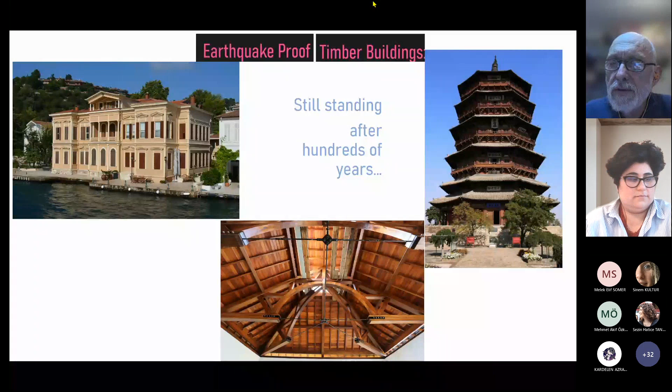So that was the second slide. We have examples of timber buildings in high earthquake regions, and they are still standing. On the left is a Turkish building. On the bottom is the concert hall in Boğaziçi University. On the right is a 70 meter high Chinese pagoda from the year 1000 - so that's 1000 years old.

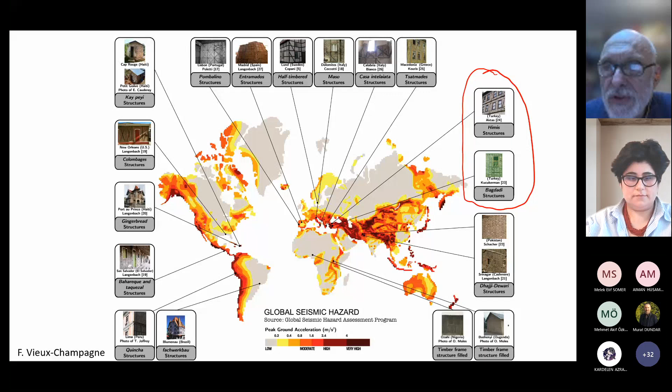So it's a very nice compendium that shows, all over the world, where the seismic hazard is biggest - you see the red and brown colors - there are a lot of examples of buildings made of wood that are still standing and behaving very well. And here I just underline the Turkish Himis and Bagdadi structures.

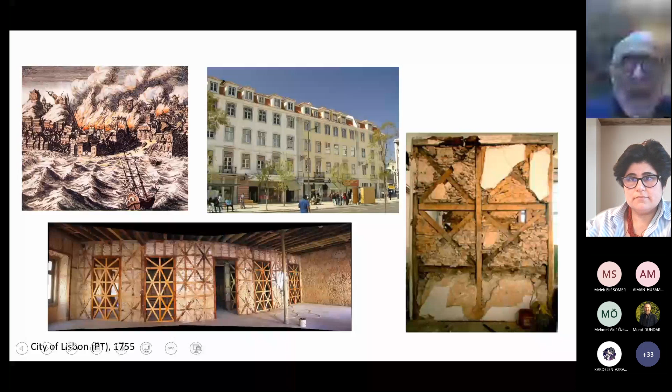It's 600 years old. Here in the city of Lisbon, after the quake of 1755, half of the city was rebuilt using a combined system of timber and mortar infill, or brick infill, called Pombalino. After the stucco, in the central picture, there is the skeleton of the Pombalino structure.

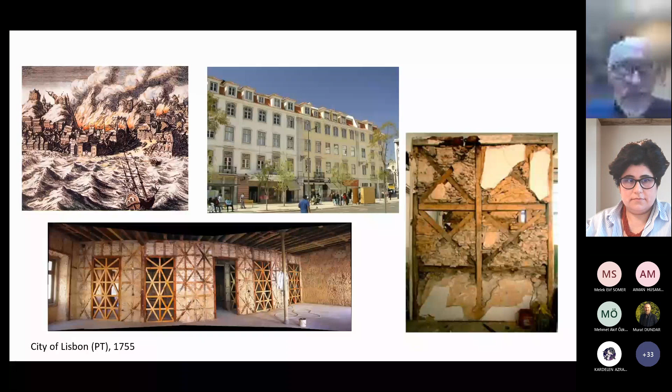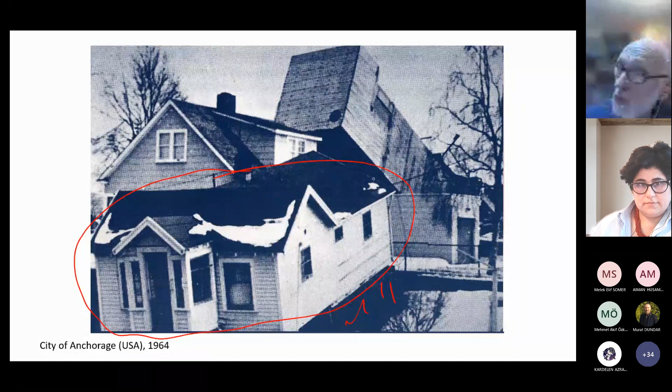Unfortunately, we have other examples from history that are not so good. Here is the 1995 Kobe quake. These two buildings are not made of wood, just concrete and steel, but you see one floor was completely missed here - the quake was terrible.

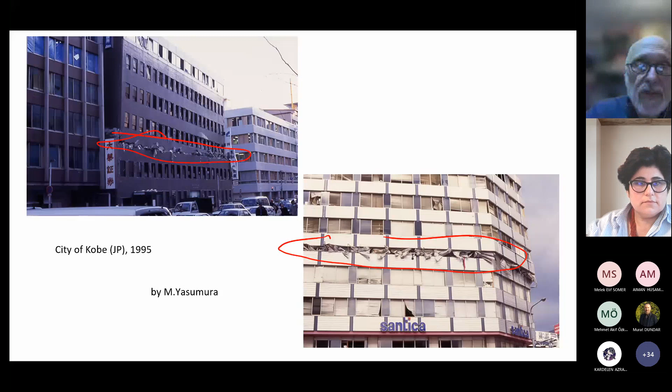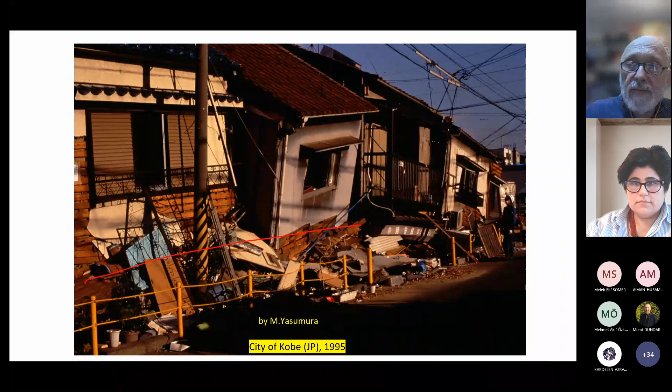And some thousands of wooden houses collapsed on the first floor. This group of houses was 2-floor houses, and the ground floor collapsed. You see here in the foreground houses like the ones I showed you before, and in the background, intact houses.

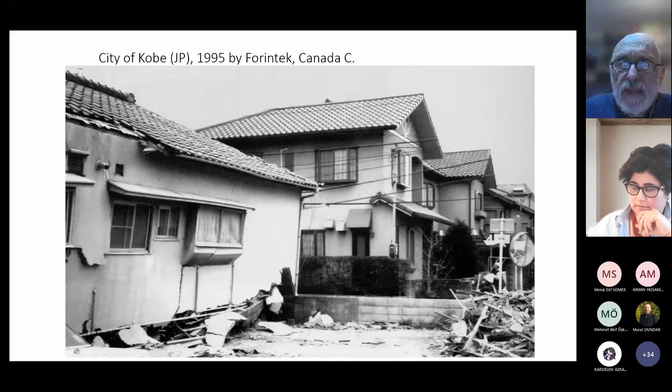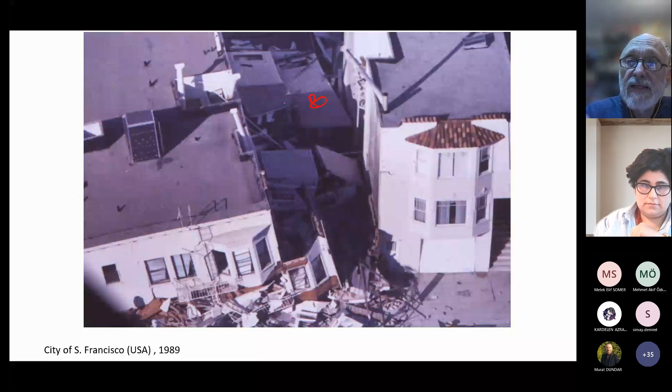How could that happen? The lesson for my students is always the same - the same thing I'm always saying. You need a good code, you need a good design in seismic regions, but you also need good execution. If one of these fails, something will go wrong. In this case, the execution was bad. In the left side building, instead of 3 nails per meter, they put just 1 nail per meter to save money, and they lost all the safety coefficients.

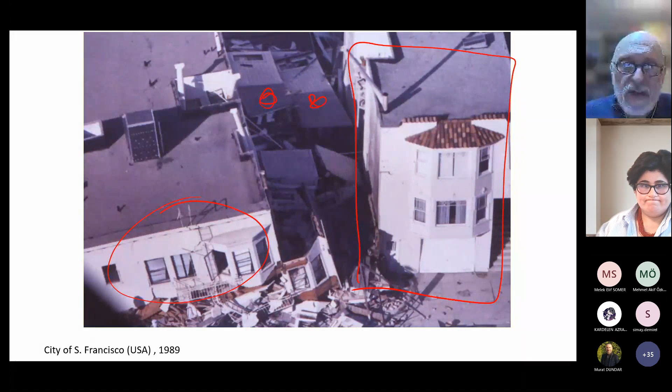So this was actually the result of a bad execution.

So, the basic concept about seismic resistance, the earthquake-proof concept, the first of our 3 points today. Before the quake, the building is intact. During the quake, there is shaking and there is moving. There is an introduction of energy to the building. The building is moving. There is a velocity. There is a kinetic energy. And after the quake, we hope that the building will still be standing, maybe damaged, but still standing.

So in the case of wooden buildings, this may happen thanks to two different points. One point is that the weight of a timber building is usually modest compared to a similar-shaped reinforced concrete building; it is 1/3, 1/4. And the second point is that the total energy input at the base of the building is dissipated within the structure without collapse.

So point 1, when I say the weight of the building is modest, modest means everything, it means nothing. The point is, modest means that a wood structure is lighter than, let's say, an equivalent reinforced concrete structure. This is not a joke, actually. It's just the same building painted gray on the right-hand side, and it can even have dimensions similar to a concrete building. This is a timber building. This is actually a fake of a concrete building.

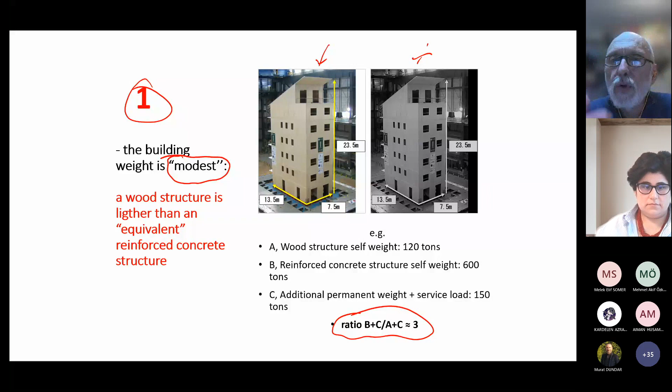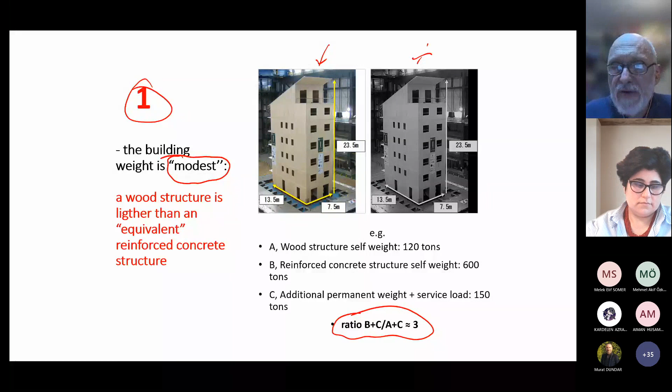But the point is the ratio between the weights, the seismic weight, is three times, because the weight of the building is given not only by the structure, but also by the sidings, the floors, all the HVAC, everything, the people. So the ratio between the self-weight of concrete and wood is not the same ratio as the density of concrete and wood. The ratio of the density of concrete to the density of wood is 5 times, but in real life it comes down to 4 to 3.

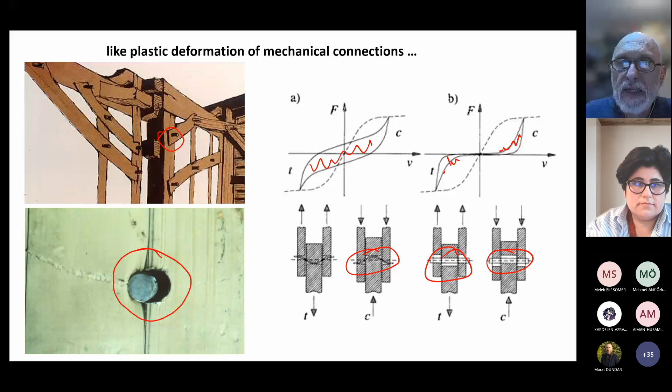The second point is that the total energy input at the base of the building is dissipated during the quake. So we have dissipating energy here by connections between elements. So at the end of the quake, we have a 3-hinge arch that is still standing. So the energy is dissipated at the level of mechanical connections through plastic deformation of the connections. Here they have plastic deformation, and this is the energy dissipated according to the different connections, because we have internal damage, but this internal damage dissipates energy and helps the building stay standing.

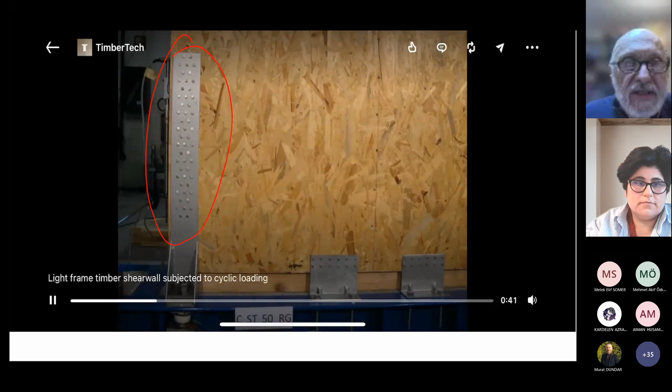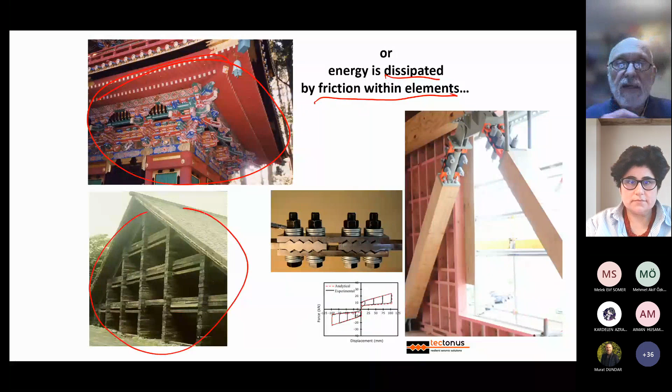Let's see if the movie starts. You see here, all these nails are dissipating energy, moving. All the energy is dissipated by friction within elements. Here, in this Japanese pagoda, there are no nails, not at all, only wood. So energy is dissipated by friction, not by the deformation of nails and the bending of the wood. So here is Indonesia. Here, the energy is dissipated by the friction between elements.

So this concept of friction is being used, very newly, in New Zealand by the University of Auckland. They invented a friction dissipating device that is called Tectonus. This can be used to dissipate energy with no damage. So the difference between this one and this one is that with the second one, there is no actual damage.

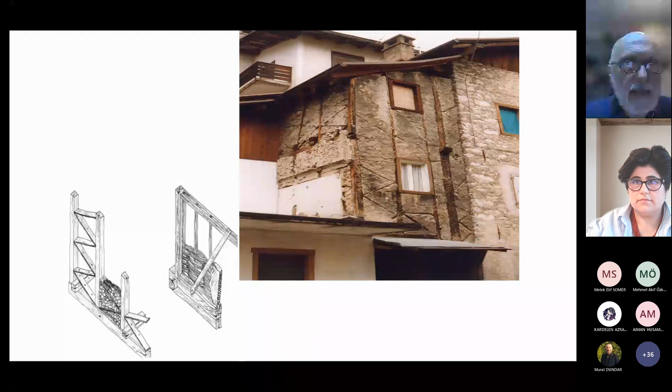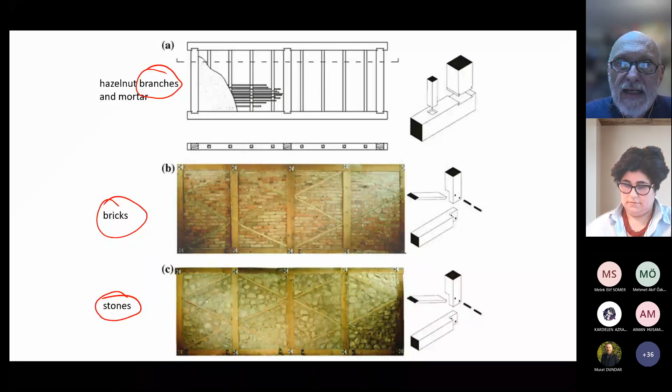So this is important. I show you these pictures here because this work was done by a student of mine when I was in Venice, and this student was an architecture student. So this is the north of Italy, and these are similar to the construction we have seen before, the timber frame, with infills of branches, bricks and stones. So this colleague of yours, some years ago, a young, very enthusiastic student, built all these specimens by himself, and he tested them under a force going this direction and going back.

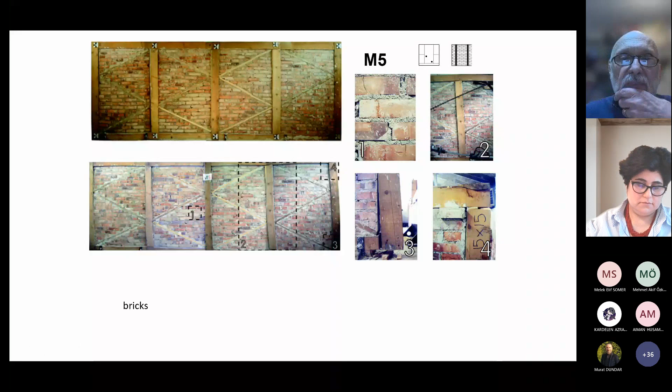And this is the hazelnut branches and mortar. And you see the final result and the damage. And then there is the stone. I'm not showing you the stone one, but there are also the bricks. And you see here the damages, and you see here the bricks and the hazelnut branches. So you see here the difference between the hysteresis, the energy dissipated. And also the strength is 5 times more, and the final displacement is much bigger.

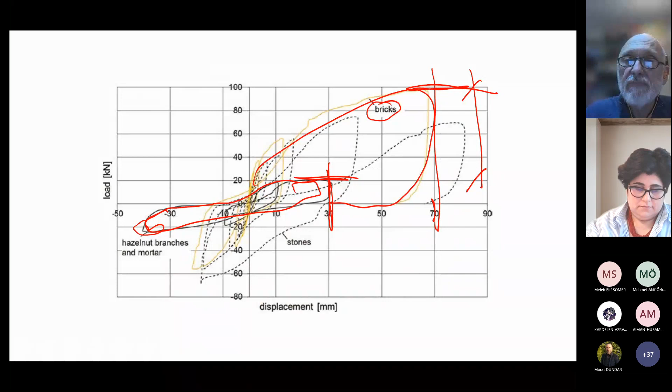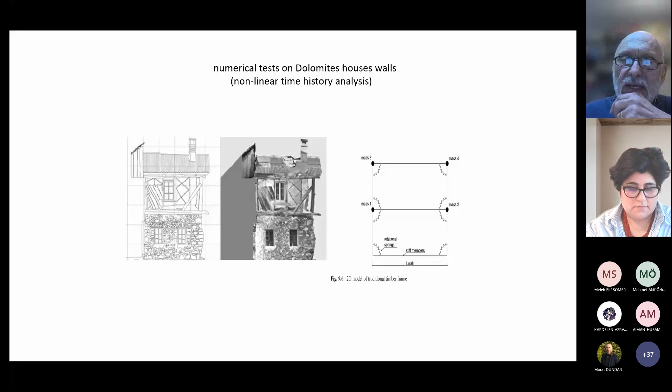So actually this is a work done by another student of mine, but this one was an engineering student, and she made a model of this, and at the end she came to a conclusion about how the branches one and the bricks one, buildings made of these walls, could resist a big ground acceleration of different quakes.

Why do I show you, students of architecture, this test? Just because you will be asked in your career to evaluate how to restore an ancient structure. Engineers tend to reinforce everything. You as architects should keep your engineer colleagues calm and ask them to try to judge better and to make tests, because calculations per se, in my opinion, are not enough. You risk over-reinforcing buildings that actually don't need it.

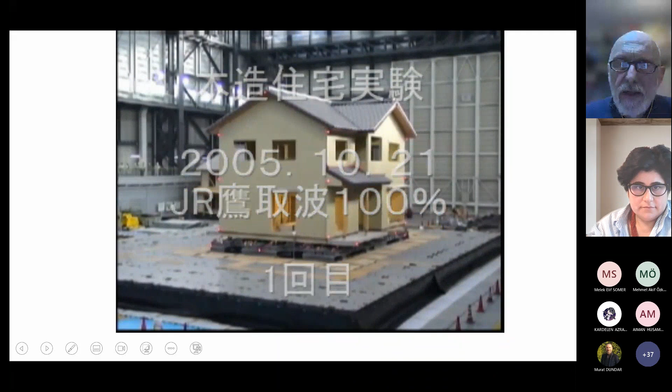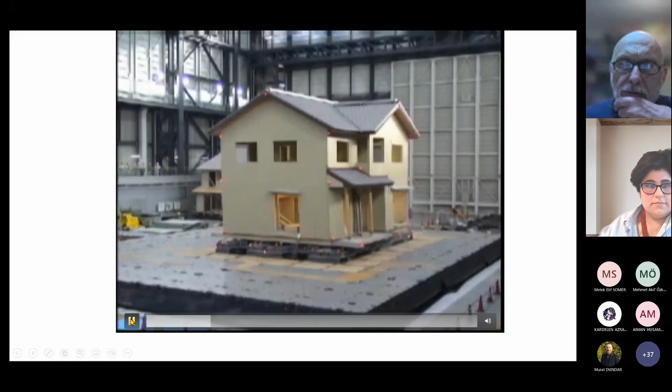So here there is a test. I suppose you don't hear the noise, you hear my voice only. This is a test done in 2005 on a 2-story Japanese system timber construction in the NIED laboratory in Miki, Japan. Sorry. So this is the first test, 2005. And you see the building is moving. You see some damages here. But the building actually is resisting.

So just let me check. Do you hear my voice? Hello? Yes, we can hear you. No problem. Okay, you have seen the movie? Yeah. Yes, sorry, because I must confess, I wasn't able anymore to give lectures online with my students at Boğaziçi. It's always very tiring to me. I don't see anyone, I speak to myself. Sorry about that. I need some confirmation from you that you are seeing what I'm showing you. So,

Oh, I'm sorry. So the Japanese actually do it like this. When they have something new, they make a test. This house was built according to the new regulations, and the company built this prototype. They came to NIED and made this test to show this house was capable of resisting a big quake, the design quake, and it resisted. The results were satisfying. Everyone applauded at the end of this test. Everyone was happy because this means earthquake proof. So lives are protected. No one would have died in this building.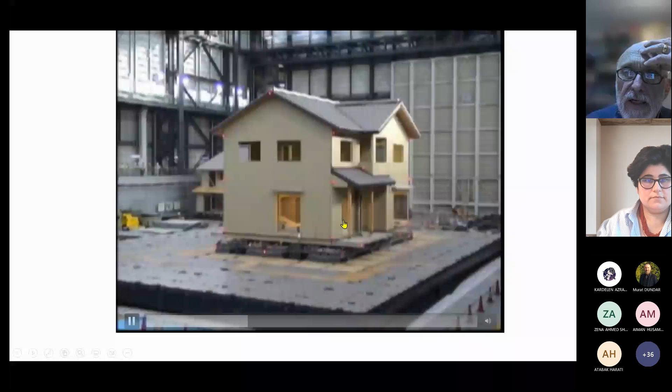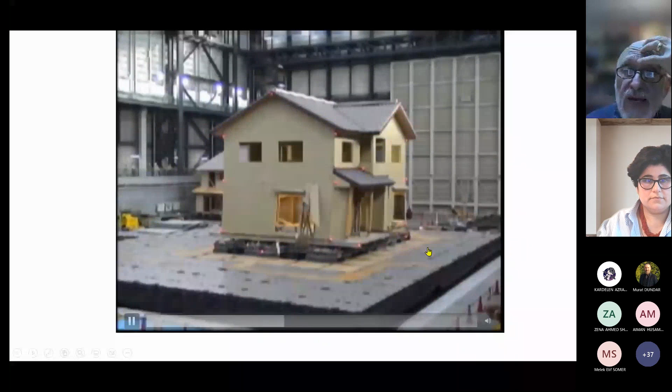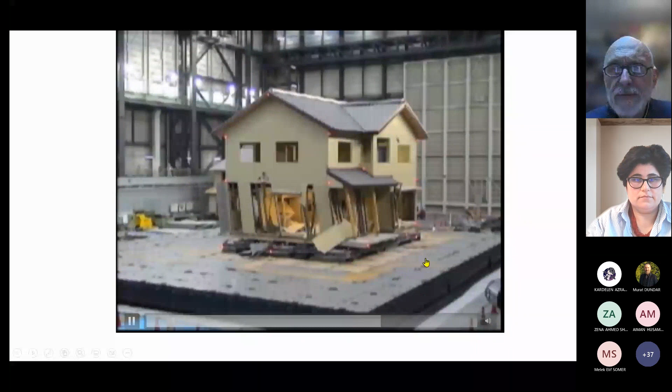But as researchers, they continued the test without any intervention. And this is the second test. And this is the quake, the 1995 quake of Kobe. Of course, this one actually is a little frightening, but this building is still standing. And now we have the third quake in a row. Okay. So, as I said, this test was successful.

Everyone was happy because human life was protected. The same concept we have in our cars. This is a famous example of a Formula One Grand Prix, and the pilot is safe. The car is wasted, but it doesn't matter. The human life is protected. So the concept of earthquake-proof timber buildings is that human lives are protected.

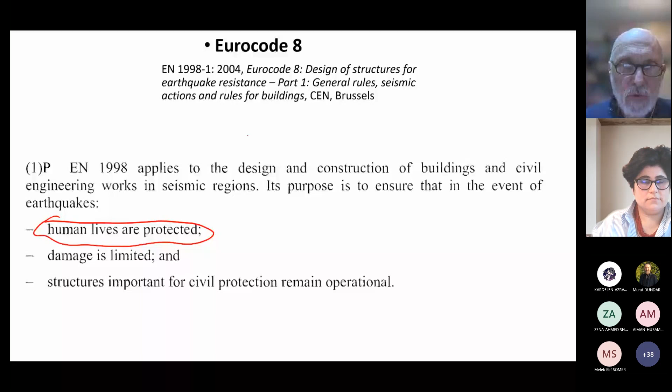But in Eurocode 8, and of course in your Turkish seismic design standards, one of the most advanced standards in the world, there are several levels of, let's say, safety. The first level is the one I showed you now, I spent these first minutes talking about this: human lives are protected. But they also consider other buildings, the so-called strategic buildings that must remain operational after the design quake.

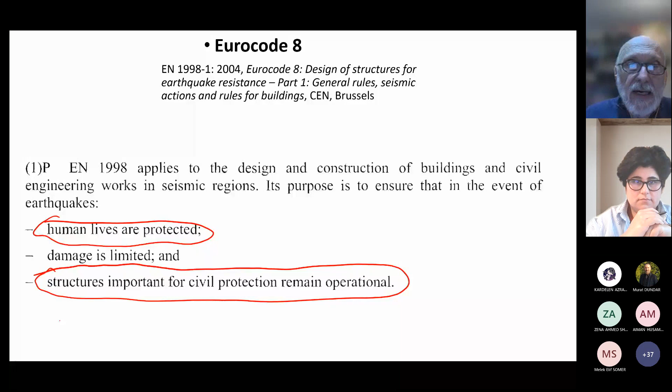So a difference is made between ordinary buildings and strategic buildings. The design level quake of these two classes of buildings is different. That means the strategic buildings can be designed to resist such a large quake without any important damage, but of course they will cost much more than ordinary buildings like houses.

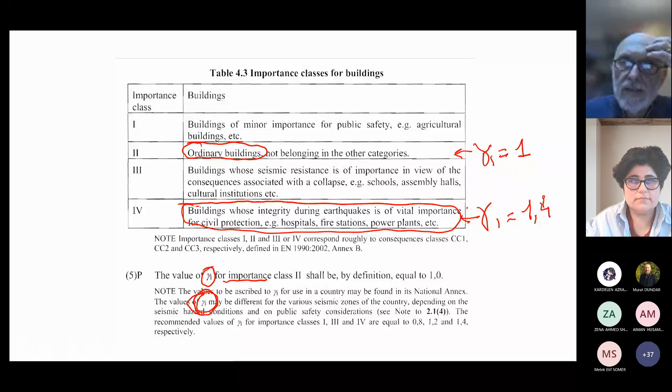So in Eurocode 8, a so-called importance coefficient, gamma I, was invented. Gamma I for ordinary buildings is 1, and gamma I for strategic buildings is 1.4 or 1.5. So what is the point? You increase the design action of the quake. Look at this.

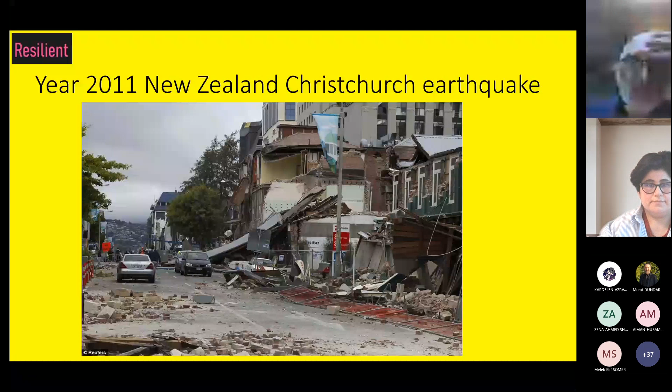But what was the problem? The problem was that all these buildings were actually abiding by the rule of saving lives. No one died in the Grand Chancellor Hotel. But the point is that this hotel was really damaged. No collapse, but heavily damaged. It was decided that reinforcing was impossible, and they decided to demolish it, floor by floor coming down. It cost a lot of money.

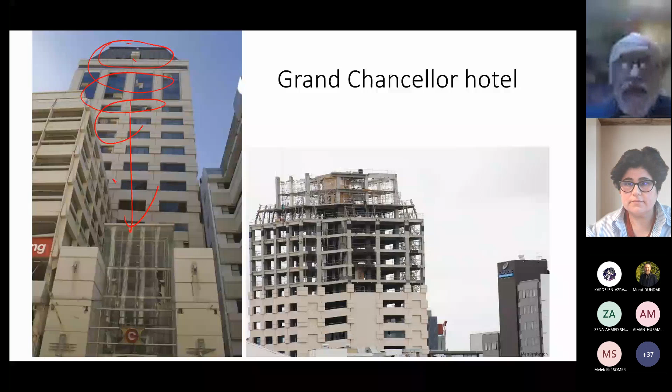You must know that in New Zealand almost all buildings are insured against quakes. That means that if a quake comes, the insurance companies must reimburse their clients. In the case of New Zealand, insurance companies would take around 40 years to pay off the cost of the Canterbury earthquake. 40 years. So they risked going bankrupt, actually.

So in order to avoid a similar situation: they had casualties, of course, but a lot of buildings just needed to be demolished. Under the pressure of insurers, we should think from now on to design regular buildings, even if they are not strategic, more or less as strategic buildings. This is the formula used in Eurocode to consider the design shear earthquake action at the base of the building, increasing this quantity by the coefficient gamma I.

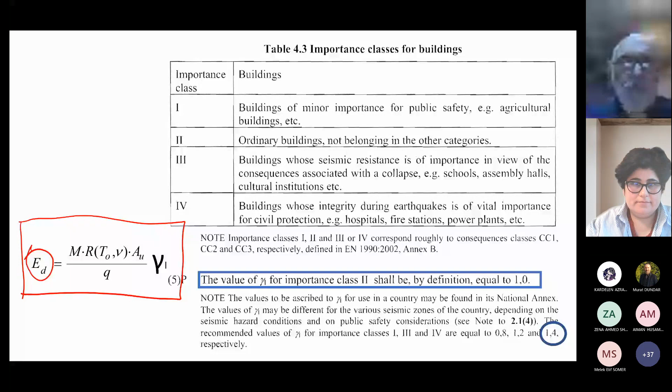In fact, in 2017, at the World Conference in Chile, this word resilience started to appear, and resilience was considered a new challenge in earthquake engineering. The present seismic design criteria of life safety, requiring that buildings do not collapse, must be replaced by codes that allow cities to continue operating within a few days. This is a consequence of the inability to evacuate millions of people from a megacity. There is also the point of making insurance companies work profitably, with no bankruptcy.

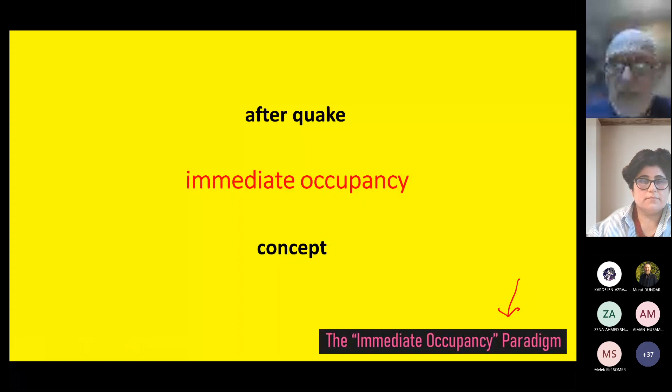So these are the strategic buildings. Of course, we may not say we want to build every single house as a strategic building, but between life safety and operational there is the concept of immediate occupancy. An immediate occupancy building is safe to occupy, but possibly not useful until cleanup and repair have occurred. The important point is people can immediately re-enter the building. Maybe it's not perfect and needs some adjustment, but it's still occupiable.

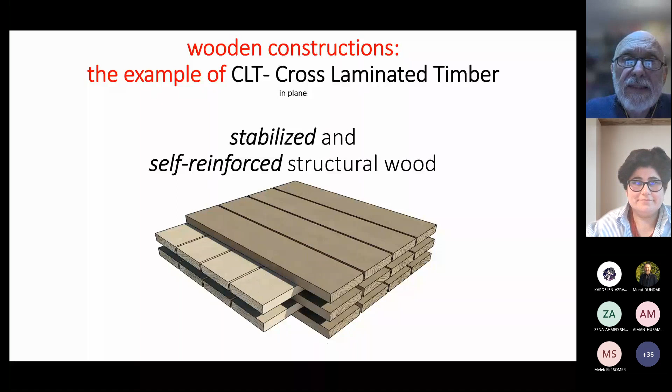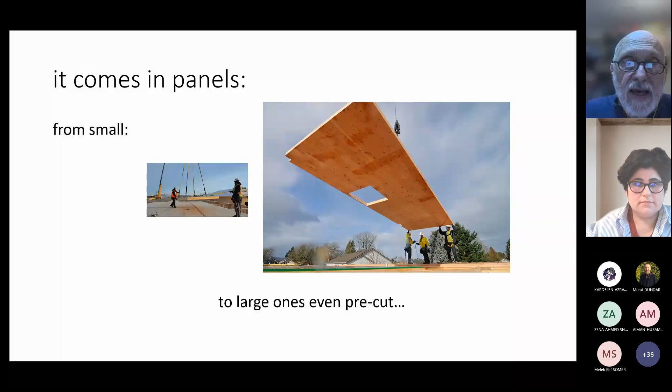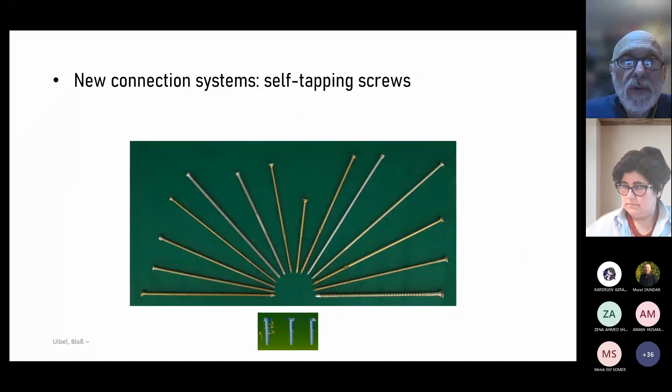Regarding wooden constructions, since my presentation is about wooden constructions, I show you the example of cross-laminated timber. I'm getting short of time, so I'm going a little bit faster. This product was invented and tested at the end of the 1990s at the University of Graz. The panels come in big or small dimensions, can be worked very precisely, with 1 millimeter precision, and are connected with self-tapping screws and plate connectors.

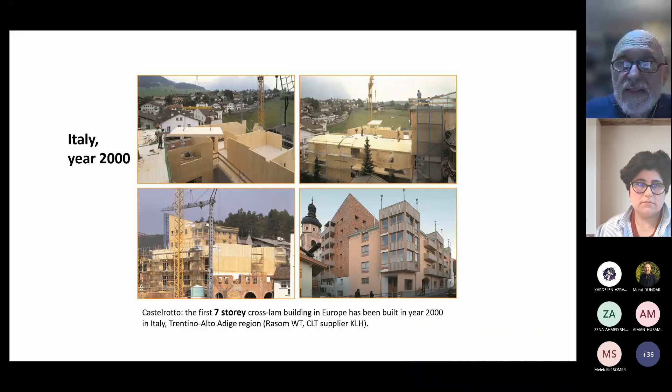So you can build a very rigid and stable building made of these panels connected by nails, screws, and connectors in a very efficient way. And construction is very fast. In Italy, this was the first medium-rise, 7-story CLT building.

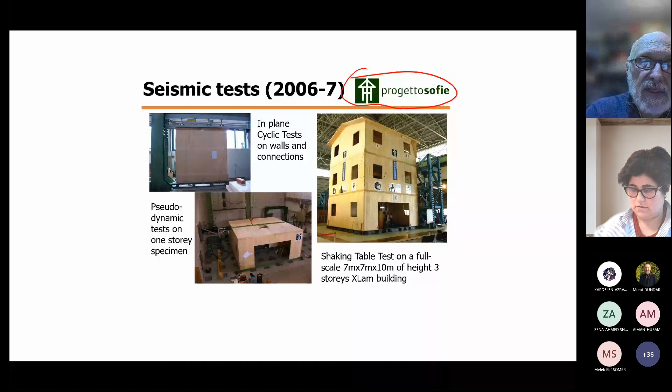But at the University of Graz, no one checked the CLT buildings against earthquakes and seismic actions. So this was done in Italy with Progetto SOFIE, and we started testing single walls, then one floor, and then three floors. And you see the testing on one wall, you see the hysteresis loops. At the beginning, we thought that because these panels are very rigid, the dissipation of energy wasn't actually very much. Instead, in real life, we detected that the energy dissipated here can be important.

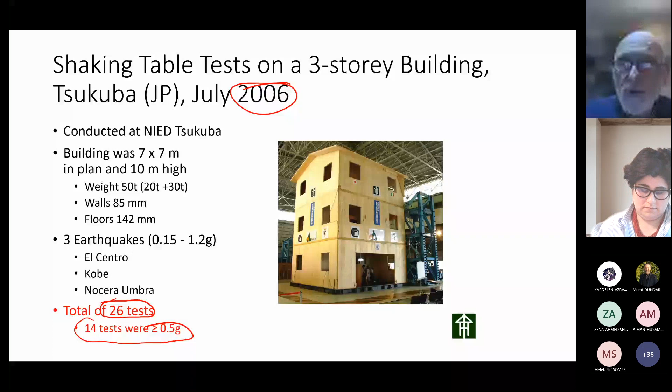In this building, we made a total of 26 tests, and 14 of them were more than 0.5 g of peak ground acceleration. So this was the first, this is 2006. You remember the movie, the Japanese movie, 2005. So when we went to Japan to test this building, I must confess, I was thinking this building sooner or later would collapse like the other a year before, but it was impossible to make this building collapse.

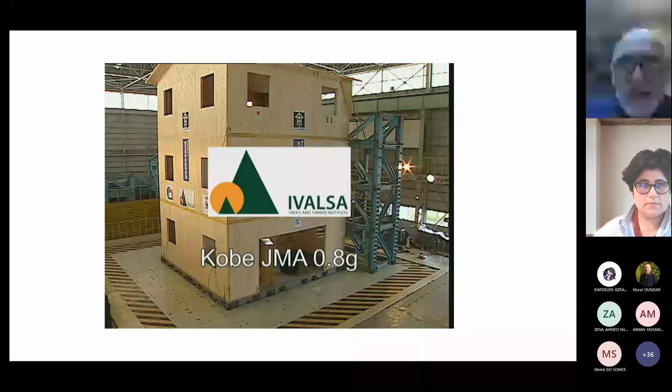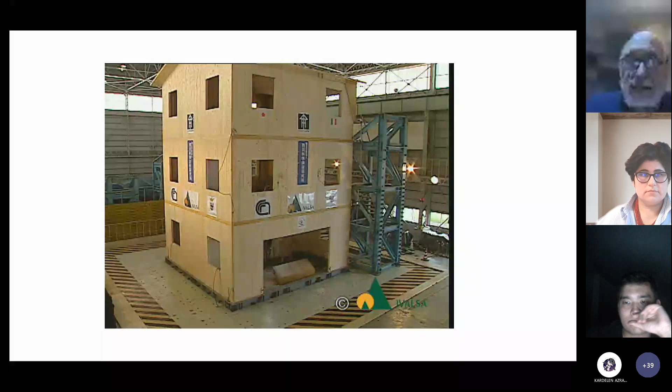So this is the real Kobe, the one that destroyed the building before. And this was all. And a lot of tests. At the end, we gave a 1.2 g quake, and the only damage was here, a few nails broken, but the building was still standing very straight.

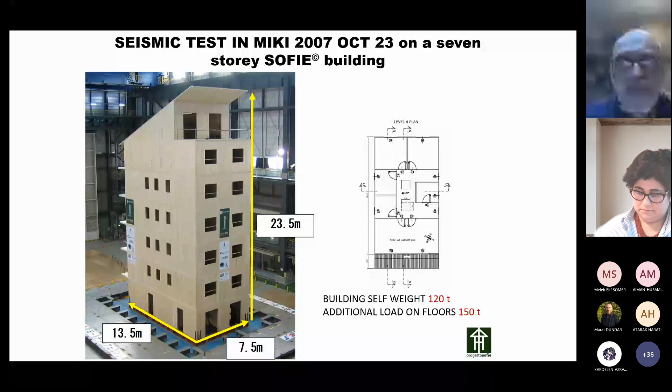So the year later, 2007, we tested a seven-story building. And here you see the arrangement of the connections. And that building was designed according to Eurocode 5 and Eurocode 8.

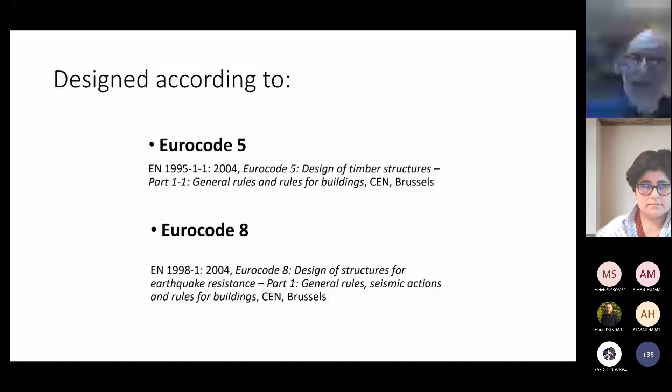By the way, Eurocode 5 and Eurocode 8 are translated into Turkish. So if you ask the TS office, you can have them. As a student, I think you should have them free of charge. I don't know, but ask your professor.

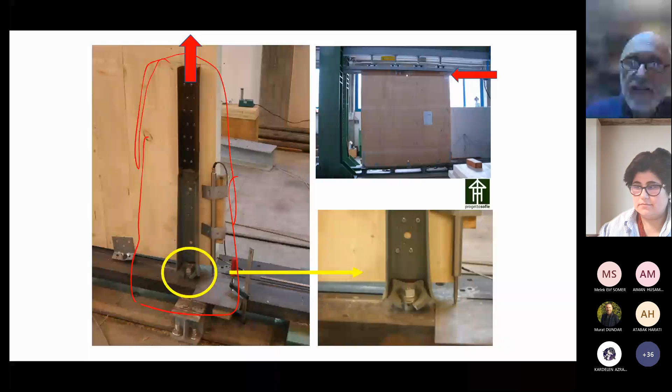Look, it takes a few minutes because there was counting from the speaker. It's coming.

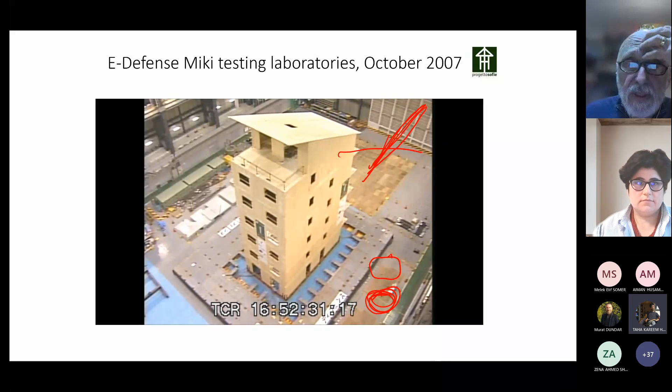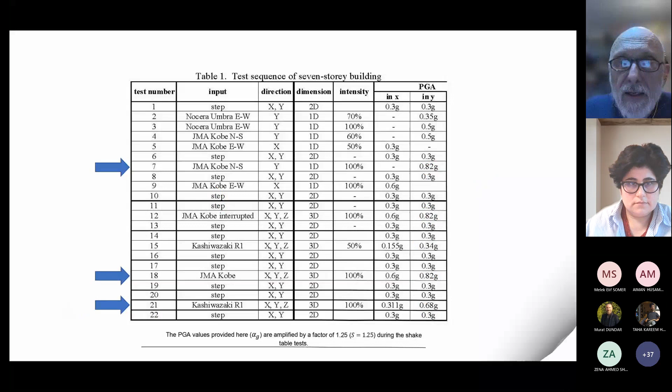That after more than three quakes, actually after, let's say, 22 tests, not all of them quakes, some just step testing. But this is test 1, this is test 2, and this is test 3 that I showed you in the movie. So after all these tests, everyone multiplied by 1.25 because of the design, but that doesn't matter. So after also this quake, the building, this was before, this was after.

If you remember the movie of 2005, the two-story Japanese building was completely different. After three tests, it was destroyed. So I must say that since then, there is no more test on timber buildings that will achieve collapse, but everyone wants to test resilience, to show that their buildings are resilient.

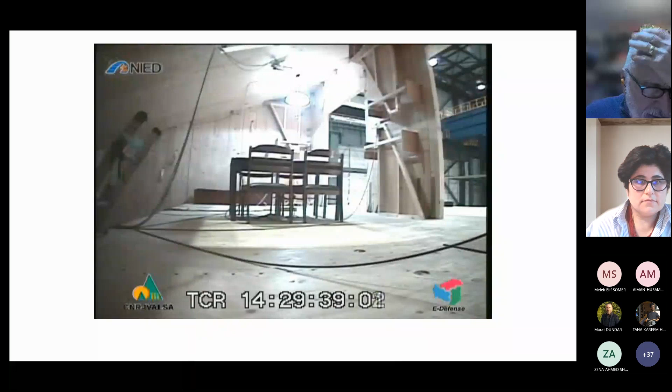Here, what does immediate occupancy mean? If you look at the short direction, the frequency of the building after all the tests more or less remained the same. We had a reduction of the frequency in the long direction, but actually you can live in this building without any problem. The building is a little more deformable, but is still capable of hosting people. Okay. This is good. I mean, in this way, we can say CLT buildings are very good for immediate occupancy construction.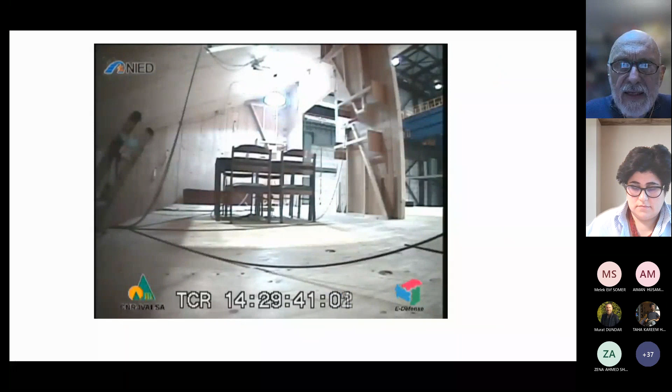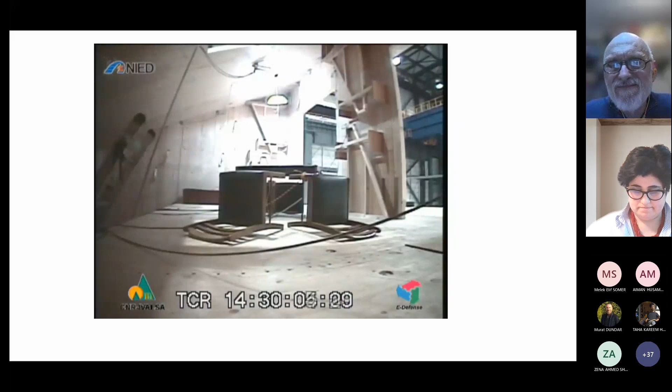But I want to show you something like this, because you may ask yourself: if this building remains, let's say, elastic, okay, we have energy dissipated, but the building actually remains mainly elastic. That means from the bottom to the top, we have an amplification of the acceleration. At the bottom, we had 1 g. On the top, we had 2 g. So 2 g is not very much, but it's still important. You see the table, etc. So the idea is a further step.

The idea could be to use base isolation, and, you know, this is the same building of 2005 that I show you later. But in this case, look here. If you look here, at the bottom there are isolators. There are isolators.

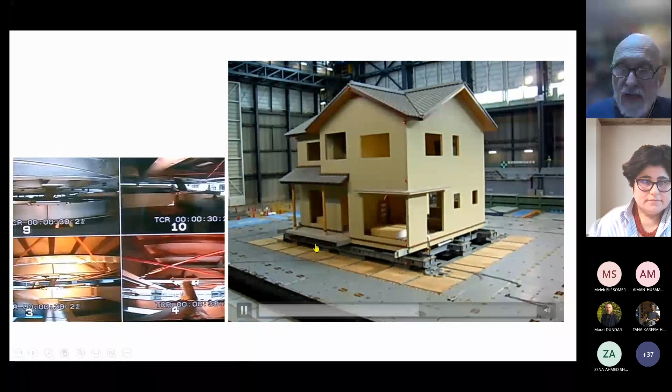You see, these are the pictures taken from below, and you see how it works. So in this case, you can actually build a house, like my friend, who was even my former student, built. You see the man here, right? This is the man. So it's a very simple 2-story house that he wanted to build on seismic isolators. I think it is not really necessary for such a small building.

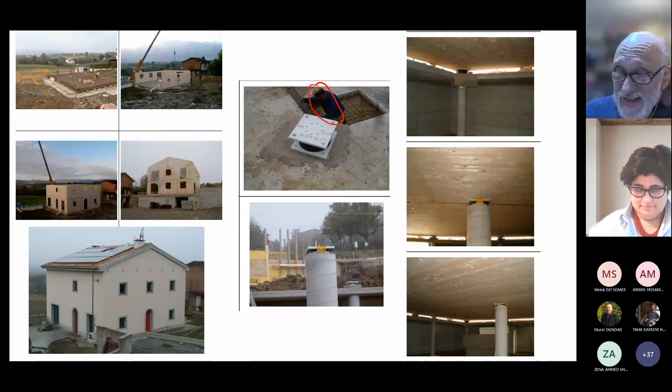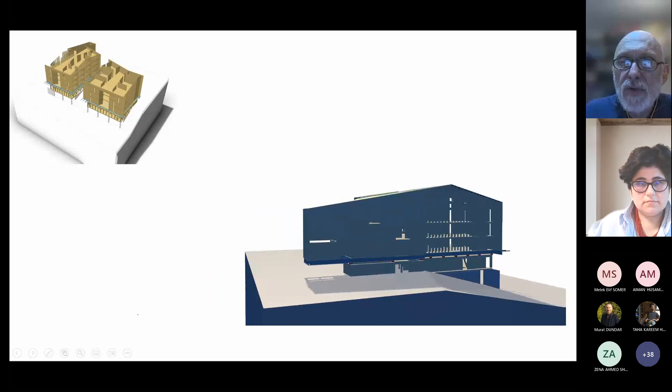But in the case of, let's say, strategic buildings like this one, for example, that has been designed and is under construction by Professor Nuti, University of Rome, you see these buildings are on seismic isolators, and you see they are moving. So in this case, you can actually guarantee that the content of your building is safe, because the amplification of the base peak ground acceleration doesn't reach the building.

So why am I showing you this point? The point is that with timber construction, you can build a resilient, immediate occupancy building for residential purposes without seismic isolation. But if you go to important buildings, or buildings whose content is important, you may use base isolation. And the cost is not actually very big. The cost is affordable. The two-story CLT building I showed you was just an exercise by an enthusiastic colleague that was very keen on timber structures.

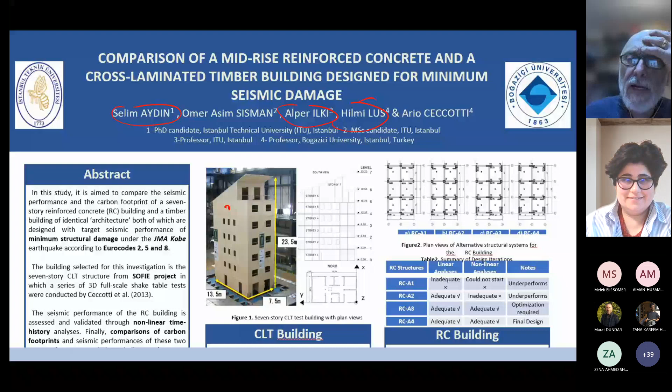And finally, just a comparison between the SOFIE building that I showed you before and an equivalent reinforced concrete building, designed for immediate occupancy like the SOFIE building. This building here was designed by colleagues from Bogazici and from ITU. They are experts on concrete. So please consider this comparison not biased. It's an honest comparison. So these two buildings are equivalent, and the colleagues studied several designs, and in the end they designed the most economical reinforced concrete building for immediate occupancy.

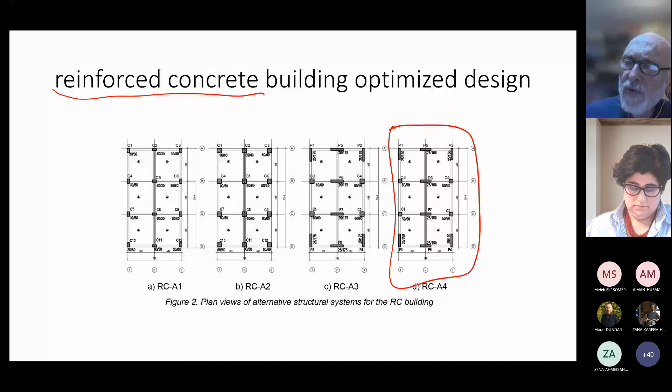And of course, the environmental cost, in terms of carbon footprint, is in favor of the CLT building. The cost in terms of carbon emission is much lighter for CLT. But of course, this was very well anticipated. In Turkey, on the contrary, today the economic cost of the reinforced concrete building for the client will be much less with concrete than CLT. But in the future, who knows?

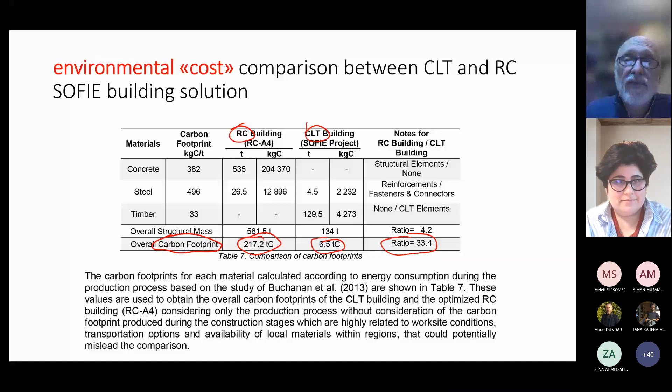But what I'm always trying to underline is that we can make a calculation of the economic cost difference, not based on the absolute cost, but on relative cost. So what is the concept? The concept is: what is the increase of cost between a normal building, designed for life safety, and an immediate occupancy building? So with CLT, from normal to resilient building, the quantity of timber is still the same, because you can't put less timber than that. Instead, regarding fasteners and connectors, you have a 7% increase.

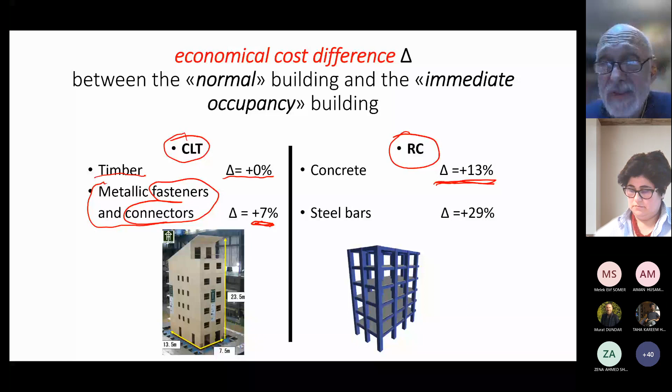If you have reinforced concrete, from a life-safety design building to a resilient building, in this case the increase of concrete was 13%. The increase of steel bars was almost 30%. So I think this is interesting. As a civil engineer, I'm not used to saying that I am passionate about timber. I admit I have a passion for timber, but I wouldn't say that timber is the best material.

I always say that the engineer, the architect, should choose the material according to the building that must be designed. But if they don't know timber, they will never choose timber. So my point to my colleagues is: try to teach timber in your universities. By the way, I can say that the target of resilience with wood is reachable at very competitive costs. So this is the final slide.

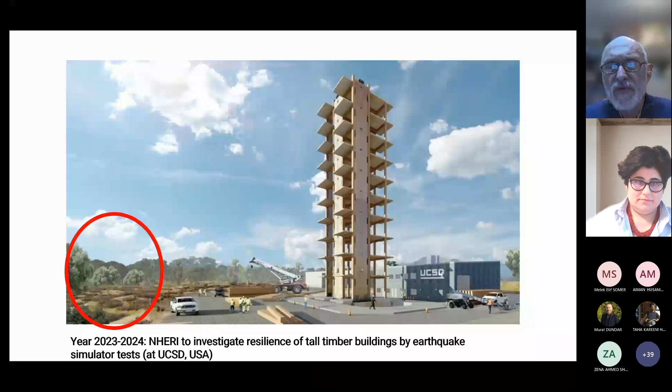We are at the University of California, San Diego, USA. I think in a few days they will start testing this 10-story CLT building. It's a little bit more complicated than the one I showed you, but of course, it's 15 years later. Our test was in 2007, this is 2023, and this test is open, it's much, much more advanced. It's very, very ambitious. And the test will last a few months, because they will test according to different situations, etc.

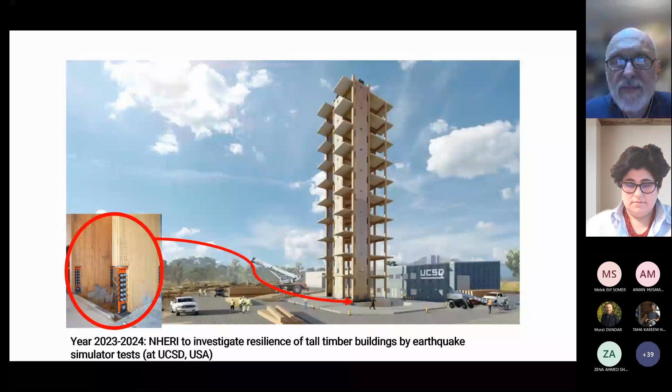And I am sure they will use sooner or later some friction dissipators at the bottom. I don't know if they will use the ones I showed you, because the ones I showed you are the New Zealander ones, but maybe some friction dissipators. So, okay, I finished. I am 3 minutes late.

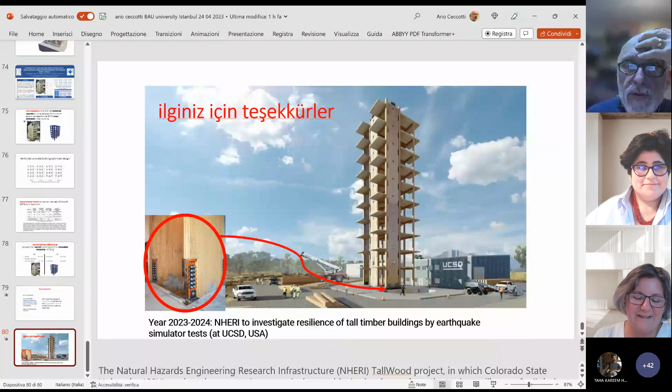Elif Hocam, maybe can ask some. This is not a question. This is always because the students are shy, it takes always a little bit more time. Yes, I know, okay. How can I see you instead of my slides? I don't know.

No, I mean, yeah. Okay, good, I see you now. Okay, good. But maybe if you can close your presentation, it's easier, you have more space on screen, maybe. I'm not sure, but if you can stop sharing the screen, I see you. I see the mat, I stop sharing. And I hope if some question is about my slides, I can be able to resume the slides. I am sure.

In Turkey, because you have been in Istanbul, you know this is always the same topic. I'm just asking this. In Istanbul, it was like that also traditionally: burning, then massive materials, then earthquake, then timber. It was always such a change. I know you are a structural engineer and you are more dealing with earthquake, but really, I don't know how we can take this feeling of being somehow very uncertain about timber and the issue that it burns and so on. Are you also facing such questions within Italy, Europe, and Japan?